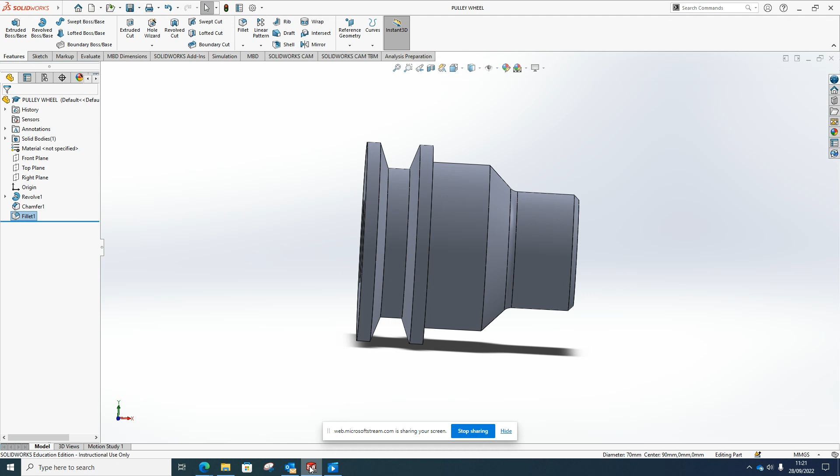So if I open a new part, this is what it should look like when we're finished. I'm going to sketch on the front plane. I'm just going to start off drawing the basic shape, and I'm going to go from the origin point. Once I draw the shape, then I can dimension it.

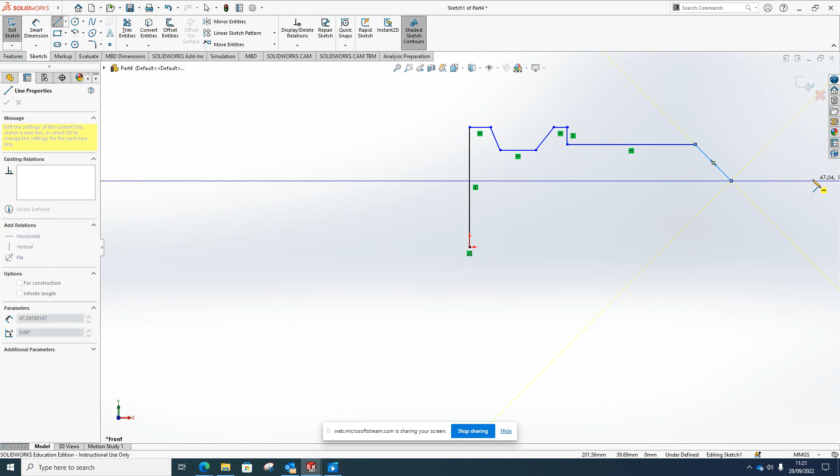Okay, so I could leave it like that, dimension it, revolve it, and then extrude cut, but it would be easier for me to draw the counterbore and the hole now, so I can draw that basic shape. So if I go across here and across, I can then delete this line. Then I can use the trim function to trim these two away.

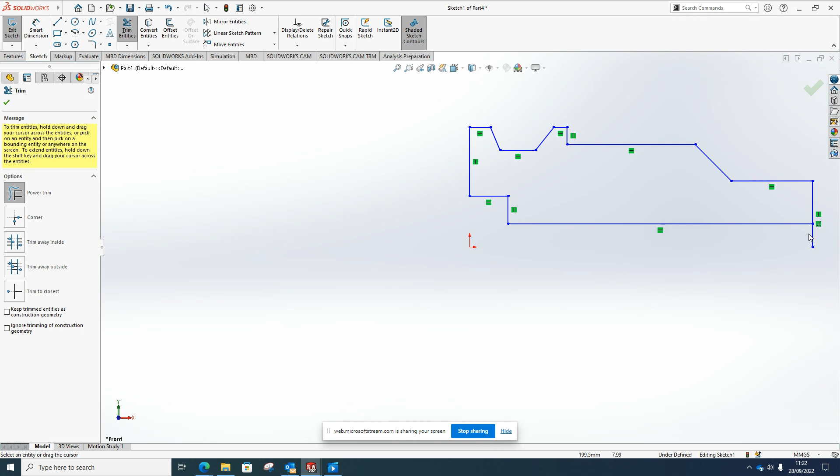Now, before I start dimensioning, there's a couple of things I want to make equal and coincident. So if I select this line and then select the origin point, I want to make those coincident. You can see the line has turned black, which means I can't move it left to right. With these top two lines, I want to make them equal and collinear. And these two tapers, I want to make those equal.

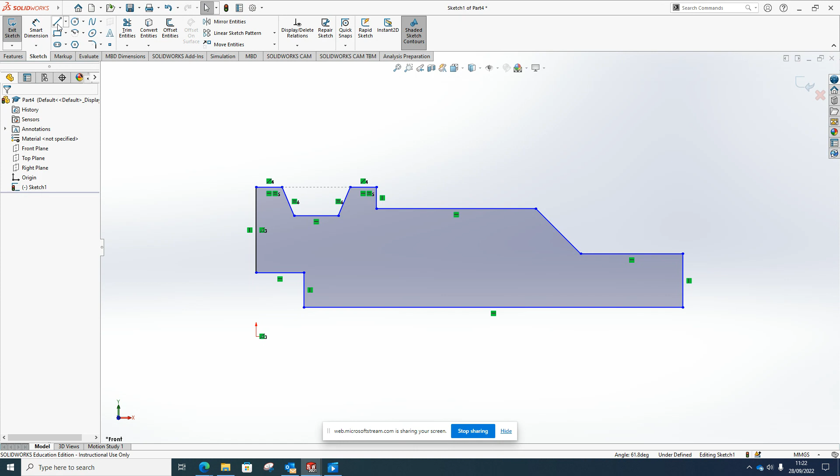So I'm going to draw a center line, which is going to be my axis of revolution, and I'm going to use it to do some of my dimensions. So the first one here, this dimension, we can see from the drawing sheet is 40, and the overall length is 130.

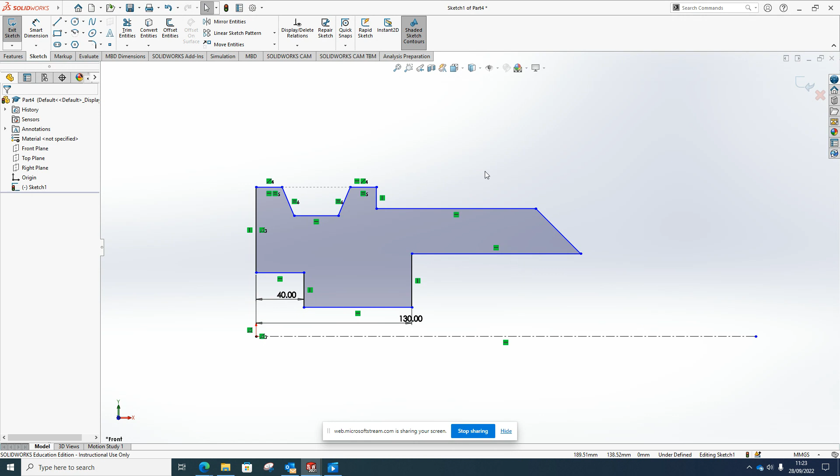Now I can drag that back, that's okay.

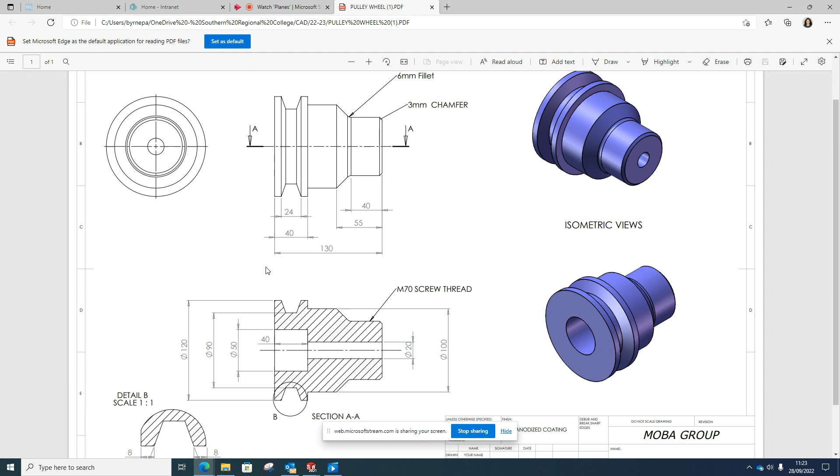So I'm going to use my center line to dimension some of these diameters. I can see here this diameter is 20, this one's 50, we have 90, overall diameter is 120. So if I pick dimension and pick the center line and go up and select this line, then drag it down below the center line, it'll be a diameter. You can see there the D on top of the smart dimension symbol.

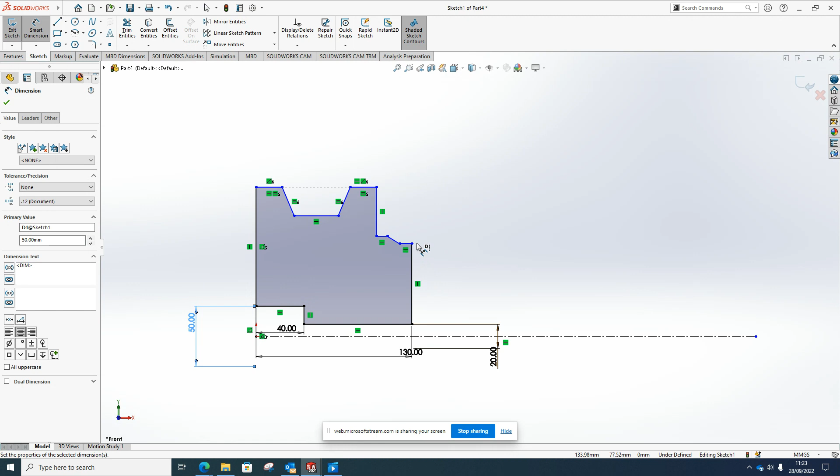So it's remembered that I'm working from that center line. I've just picked this point, so it'll be 50. From here down is going to be 70. From here is going to be 100. From this point is 90. And the overall diameter is 120.

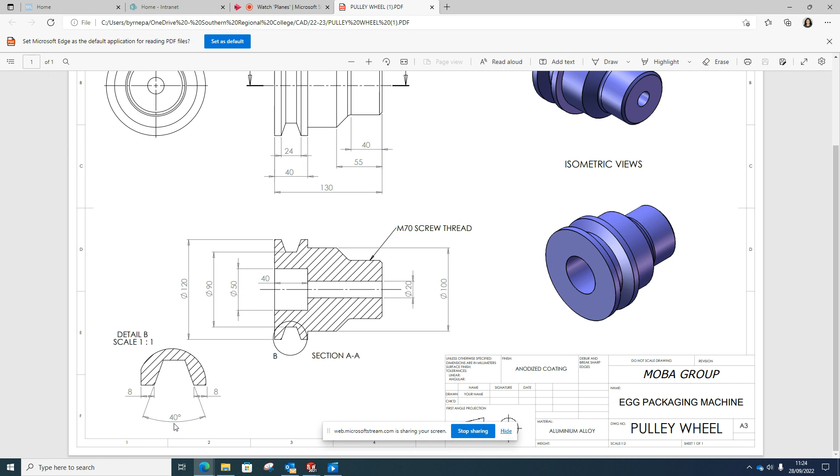Okay, there's a few more dimensions I want to add in. The angle between these two is 40 degrees, which we can see from this detailed view. So if I select those two and drag that up, the dimension of this is 8.

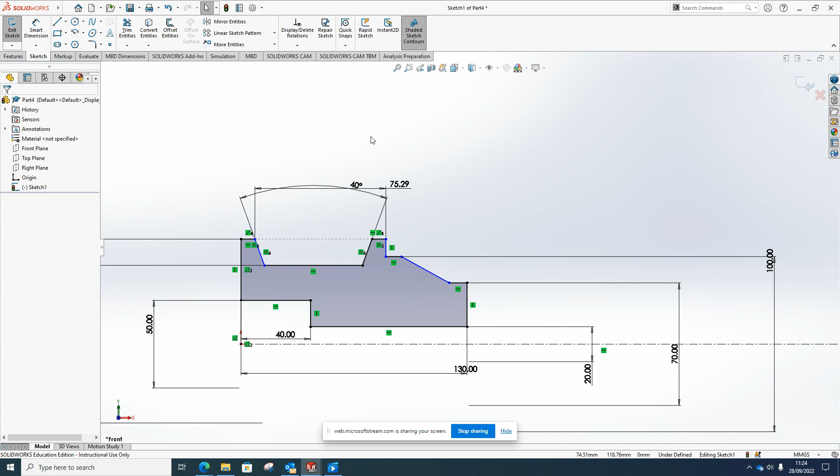And the overall dimension from here to here is 40. So from here to here is 40. The dimension from here to here is 55. And the dimension of this is 40.

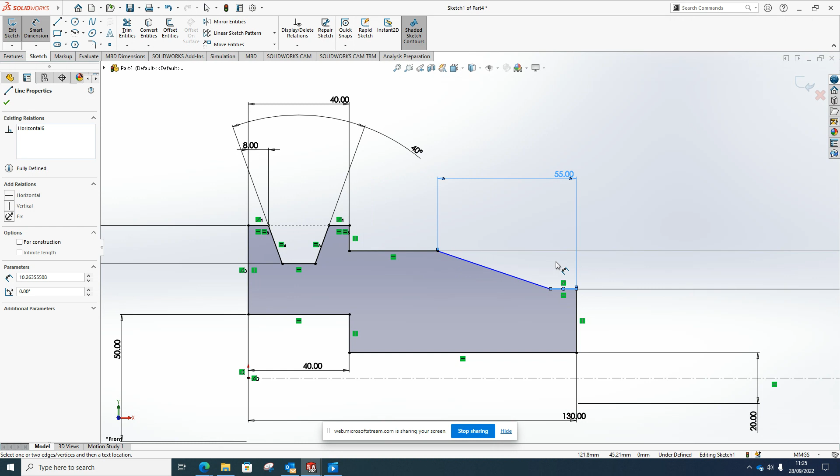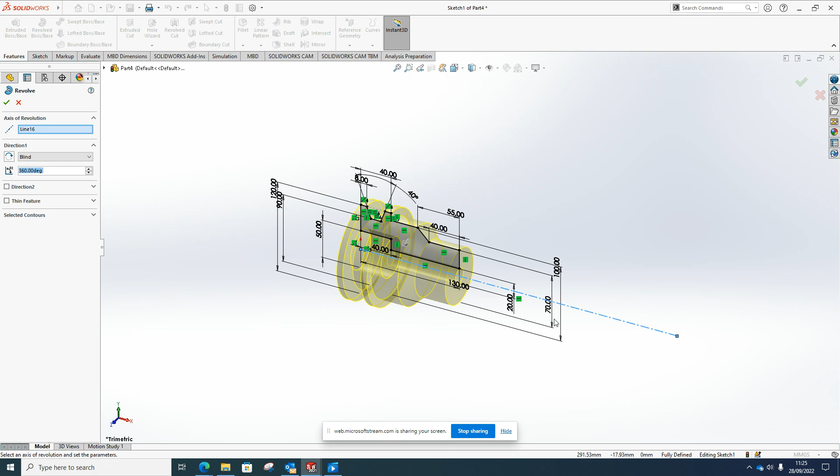So we can see now that it's fully defined, it's all turned black. So if I press this to zoom to fit, then go to features and revolve, it will automatically pick up that center line as it's the only center line and use it as my axis of revolution. So if I click OK.

So there's two things left to do. If we go back to the drawing sheet, there's a chamfer on the end here of 3 millimeters, and there's a fillet there, fillet radius of 6 mil. So if I go back here and select this edge, go to the fillet option, down arrow, pick chamfer, it's going to be 3 millimeters. Then if I pick this edge and fillet, it's going to be 6 millimeters.

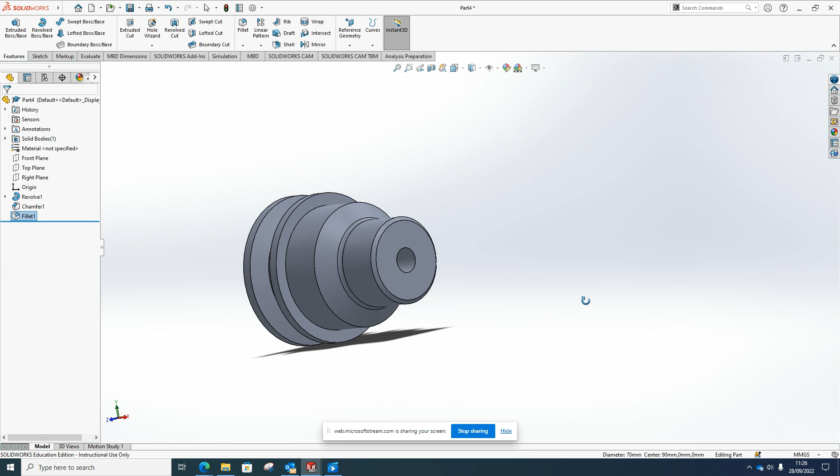And that's it. If you wanted to add a material, there's another video on this about adding materials. You can see here material not specified. If I right click there, edit material, it should bring up the full list available to me, and I can select one of those, click apply, and then close.

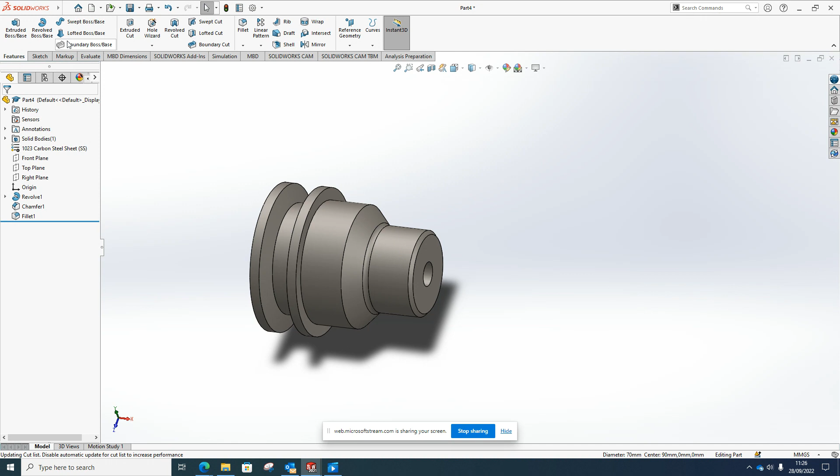So let's just pick one here for talk's sake. Go with that, apply, and closed. You can see now that it's changed color and applied that material. And again, if I go to evaluate and mass properties, it will give me a density of the material. It will then work out a mass, the volume, surface area, and gives me some other principal axis of inertia.